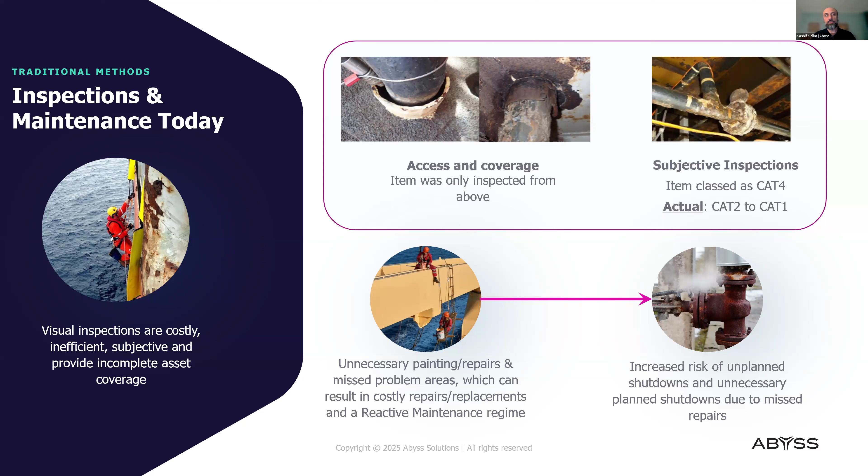Now, all that leads to unnecessary painting or repair work that ultimately leads to reactive maintenance. We don't want that as an industry. It increases the risk of unplanned shutdowns, loss of primary containment, and all these issues. That's why we keep hearing about unexpected plant shutdowns, remediation, reactive maintenance regimes and all that. Now, in the era that we are living in today, we have got a lot of industry advancements.

We talk about AI and machine learning, and there are tons and tons of techniques that are being utilized for, let's say, using the computer vision, amalgamating it with the AI and machine learning to come up with the value for the client. And again, that's one of the solutions that we have developed for the industry.

You have got advancements in field robotics. We talk about autonomous perceptions. A typical example is the autonomous vehicles. But imagine you've got a field robot that is intelligent enough to take the decisions independently. We are no longer going to give that robot a specific track to go through and carry out, let's say, operator rounds. No, these things are changing very rapidly. So the robot is actually able to sense and understand its surrounding, the perception, and take the decision independently. And that is because of the advanced sensor system that we have, supported by the cloud computing.

Now, all of these sensors, robots, they are generating terabytes of data. Now, in traditional or old days, we didn't have the infrastructure to actually, processing is a second stage, but even to store that kind of data was a challenge. But with the progress in cloud computing and cloud servers, the scalability has been amazing.

And last but not least, the subject matter expertise. I think that's very, very important. Given the sources of information and the databases that we have with years and years of experience, all of that combined together, that's what Abyss Solutions have leveraged and developed what we call the Abyss Fabric portal, which is an intelligent portal that takes in all the data and then processes it, and then we visualize that with all the insights.

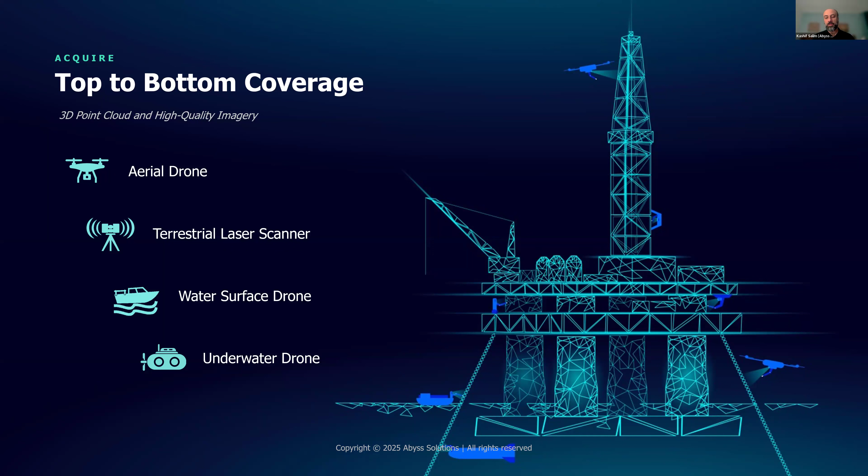Now, some examples of these robots. So I spoke about the autonomous surface vehicle, that is the Abyss Platypus, as we call it. It's a water-based platform. It's fitted with camera system, sonar, 360 laser technology, lidars, which give you 180 degrees within the underwater area. And then for the surface, you will also be able to cover any anomalies. This was originally designed for long canals, aqueducts. We've carried out some port inspections.

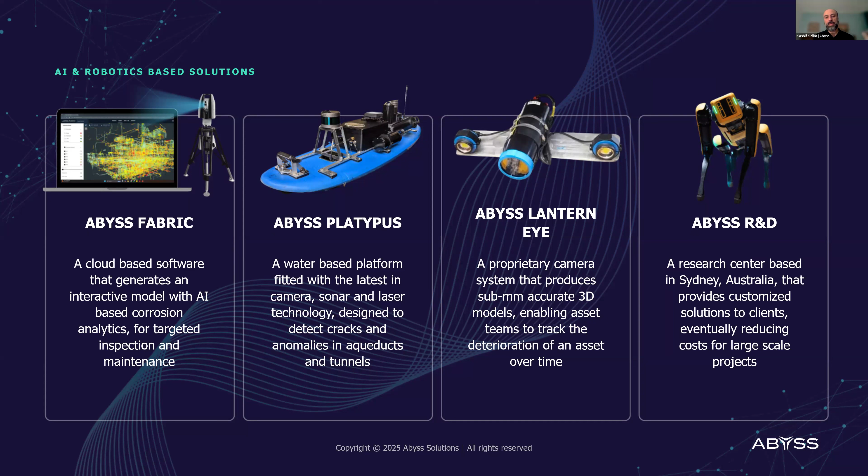That's again just one acquisition device that is used to capture the data. And then all of that is compiled together to then be processed in the Abyss Fabric platform. So that's the overall concept. Gather the data from various sources and compile that into one single source of truth.

So again, just an example of the terrestrial laser scanner. Now, this particular hardware is used for the offshore and onshore assets for the pressure equipment, including your piping and vessels and stuff. So with the laser scanner, first we carry out the scan plan by looking at the asset itself, looking at the CAD files, the general arrangement drawings.

We'll go in, carry out the data capture, make sure that we manage to capture maximum area and coverage, because that's very important. Because the next step that's going to happen is we'll apply the corrosion analytics using the AI algorithm and the computer vision on the surface that you see here.

So what the laser scanner does, it creates these hundreds and thousands or millions of points, what we call the point cloud on the surface. And that'll help create the digital twin, which is something that we can see the same asset in a virtual world.

Now, the TLS is doing two things. It's getting the point cloud, which is what you see on the screen, the green points, but it's also taking 360 images, or the RGB images, as we call them. And then we are able to combine the two together to create like a true view of the facility. You could do virtual tours, you could walk around and see the asset from the inspector's perspective.

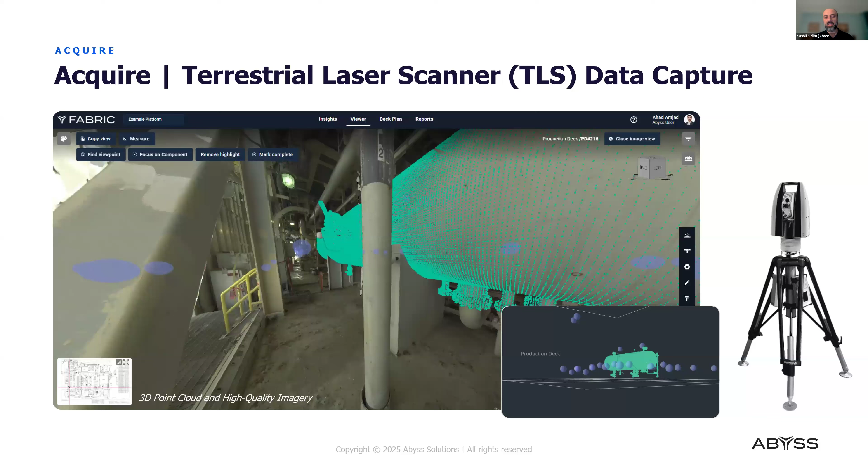Now, the TLS is utilized for the inside of the asset, but you could have the need for the drone in applications where you wanted to get data capture for the externals. Some examples could be the flare stacks, for example, or other offshore assets where the TLS could be a challenge in terms of accessibility. You could also use the drone images for structural elements like the railings from the outside. So it has its own benefits and value can be added.

So imagine data from TLS, data from drone combined together in Abyss Fabric, giving all the insights. That becomes very, very powerful for the client and for the insights.

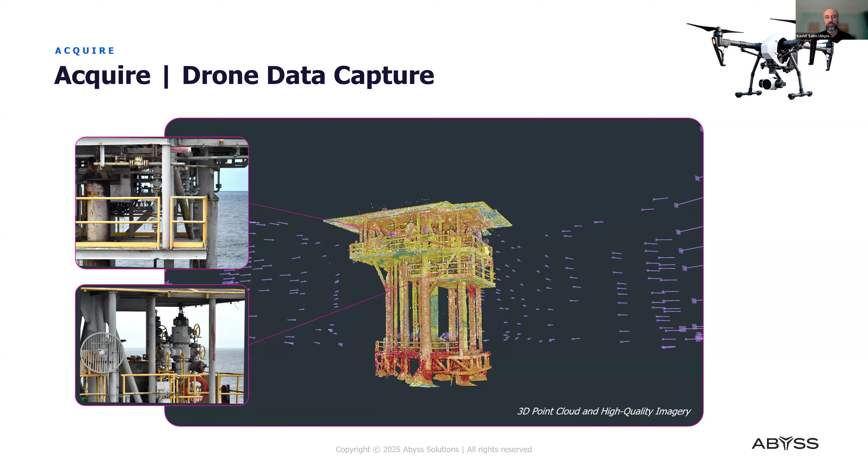The analysis part. So once we've got the data, we are able to then apply the AI and the ML algorithms to identify and classify the corrosion stage. So light, moderate, and heavy, for example. There are definitions. These can be customized.

We are also able to use some of the international standards like the ISO 4628-3, which is basically a method to assess the degree of rusting based on the density of the area. So all of these are built into the system.

So imagine you've got the data, you've applied the AI algorithm to analyze that to international standards or to the specific client's internal standards. So there's some customization that can be done to the system, and then working with the client's workflows, make it ideal for them to just integrate the digital system into their existing processes.

Now, obviously, with this type of outcome, there's always questions around the accuracies. So we have done some round robins, we have done some actual validations in the lab, site validations, and in terms of high-level results, we've got 97% accuracies on heavy corrosion, and that's important because heavy can lead to imminent problems. Heavy could have blister heights, for example, the corrosion scab. The larger the scab, the higher chances of wall loss.

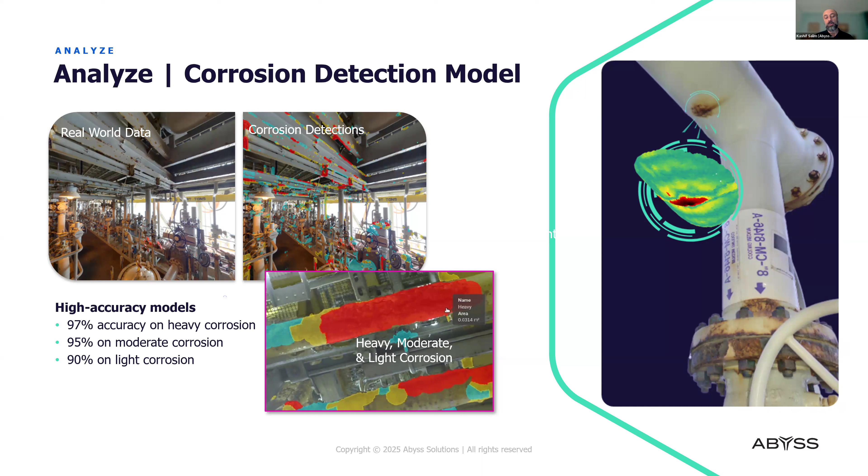Light corrosion is something which is what we call or define as coating breakdown. So it's kind of the coating has damaged and it has sort of started having some rust marks, something which can be readily remediated through, let's say, quick paint jobs. Now again, that is a value. If we can identify all the quick remedy areas, that is again a value for the client. So all of that is possible because of the digital nature of inspections.

Now, in terms of the insights, right? So, of course, when you talk about insights, you've got management dashboards to work packs generation, to where is my anomaly or where are my hotspots, where is my prioritization list, and inspectors or the maintenance teams can go and attack the area that needs urgent attention. But imagine going down to measurements of surface area that is damaged versus clean, and within damage, what surface area requires quick painting and what requires spool replacement, for example.

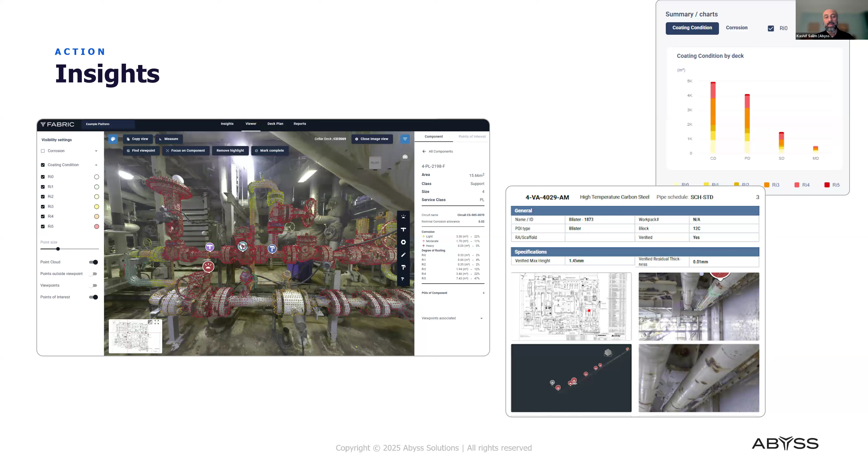Now that kind of data is gold when it comes to planning your maintenance or even procurement of your paint material for that matter, because now you can actually pinpoint exact amount of paint that you require, exact amount of resources that you require to go out at site and paint. The insights will give you opportunity to plan before you go into site. There's obviously a couple of other features, measurement tools and stuff like that. So that's the kind of insight that we'll be able to generate from that.

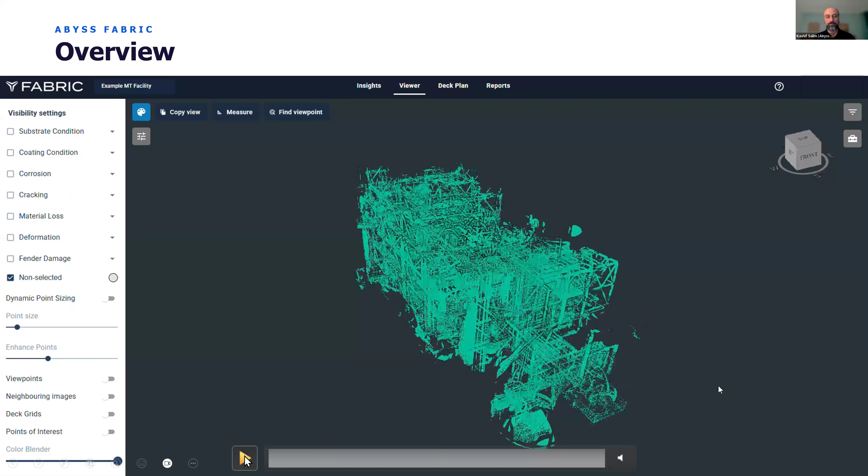Now, overall, if we look at a glimpse of the actual tool, so this is one of the assets, for example, I'm sorry, that has been captured. And my apologies. I just have to play with this.

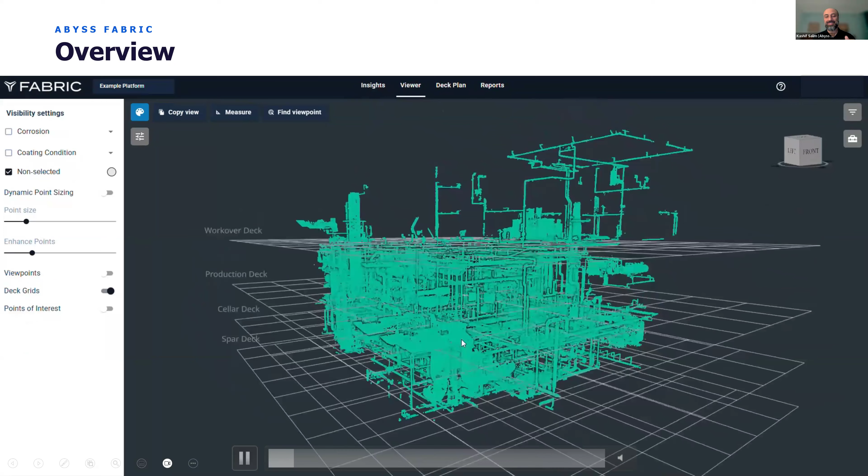So here you see a point cloud version of the asset that was scanned either through a TLS, a laser scanner, or a drone camera, right? And then the analysis part will allow us to actually segregate that. So we can actually cut it into various decks. We could do our analysis on deck level, on block level. So you could do some spatial arrangements there.

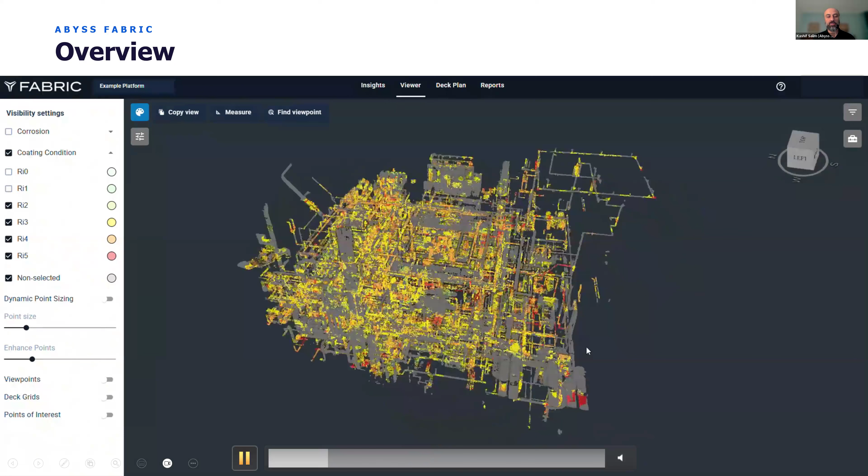And then you could apply basic filters, again, leveraging the AI, where in this case, we are applying the ISO standard for the RI values, which is your degree of rusting. And by just clicking a couple of links, let's say we're trying to look at RI 3, 4, and 5. So I can see as a bird's eye view, where are my hotspots? Where is my RI 4, RI 5 value? Right? At a click of a button at scale.

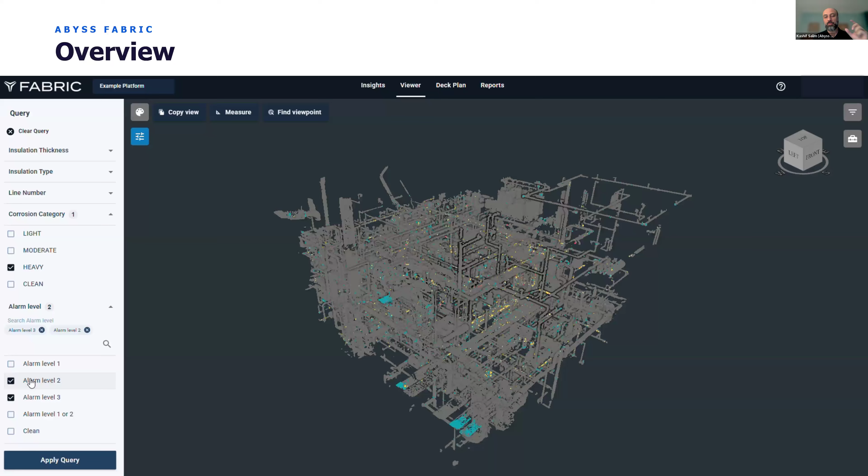Now I could do the same for, let's say, the corrosion analysis as well. Right now, I'm looking at the heavy, moderate, and light. Light being the coating damage, moderate being some sort of blistering or scaling, and heavy would be my corrosion scabs being developed, i.e. the height of the corrosion. So if I look at all my heavy lines in this case, right, I think we had about 2,000 lines on this particular asset.

Now, just by filtering all my heavies and alarm level 2 and 3, if you look at the left pane there, I'm able to come down to about 50 lines that are of interest to me as, let's say, an integrity manager or a maintenance manager. So I know that I need to plan my remediation, my maintenance on these specific lines. And remember, these lines are contextualized or they are tagged according to the client's P&IDs and their isometrics. So in a way, that process is also being digitized.

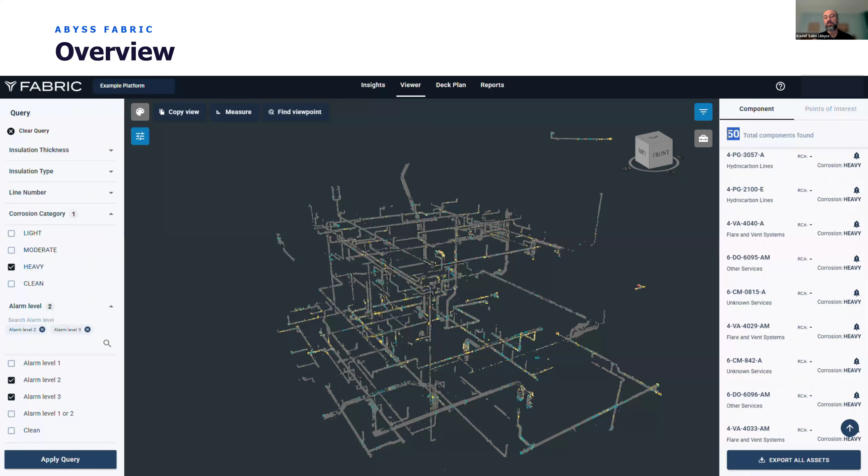So I can actually pull up individual tag number. I can pull up all my heavies on, say, 10-inch line, or I could pull up my alarm level 3s, which means if I don't do any remediation in the next sort of 8 to 12 months, this could likely go into failure or some form of a loss of containment. This kind of gives us that risk profiling on individual line on each component level, which again I think is very, very powerful.

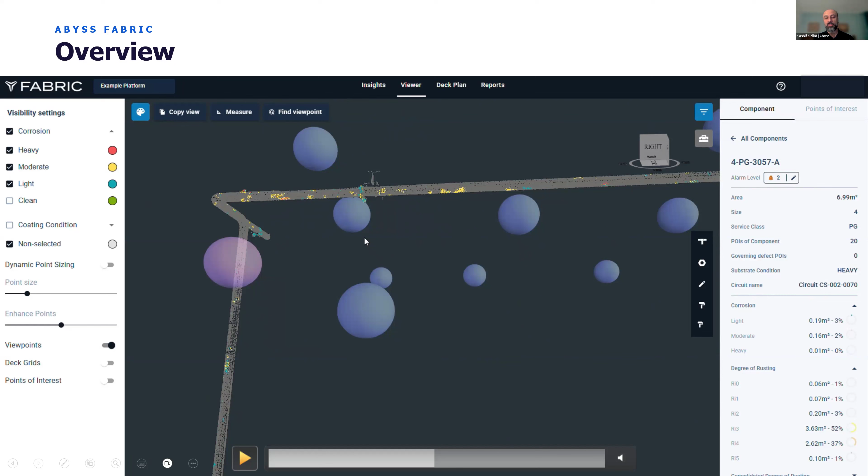So again, we can pull in each line in the 3D isometrics world. The purple balls, by the way, are the scan locations where the scans would have been taken, making sure that we cover the whole asset on component level. And the corrosion mask is available on the 3D isometrics. Again, we can see that holistically and then go into a specific point.

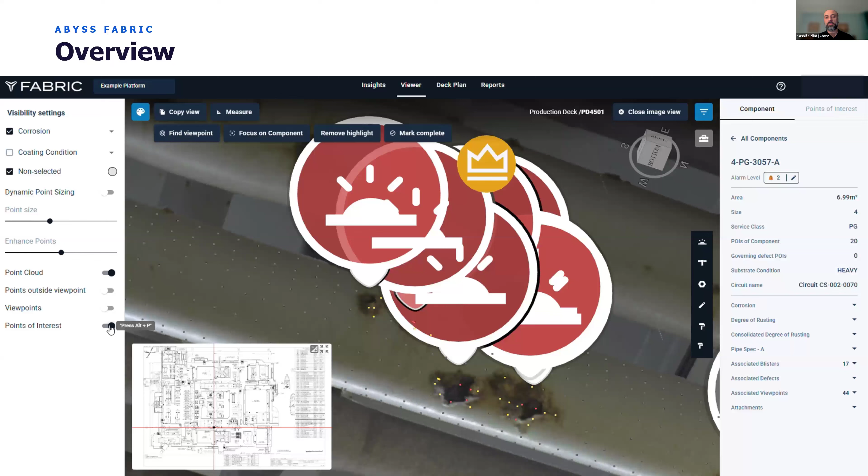So again, clicking on one of the scan locations, I can see in my true viewer what that blister looks like. And you can see based on the corrosion analytics, I can see the reds, the yellows, and the greens. The system will also allow us to put certain points of interest, or POI as we call them. So I can see all my blisters. I can search them. It's a database that I can always get into.

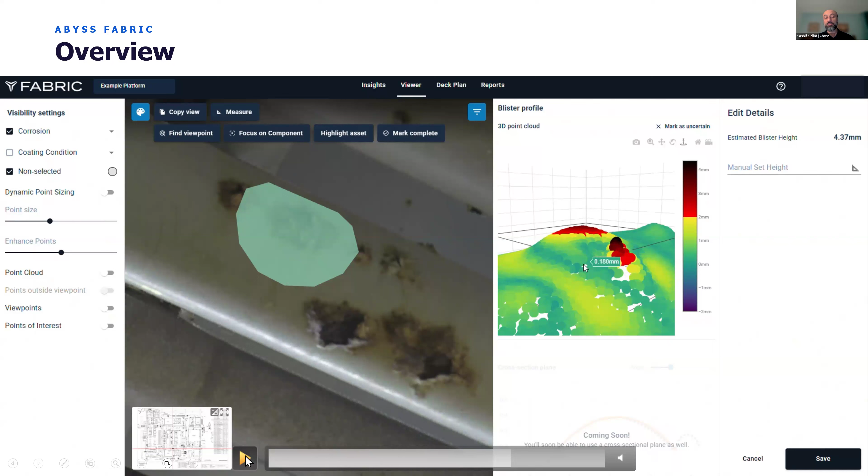Now, we saw earlier the blister height analysis tool. That is the measurement of the surface: what is the footprint of the profile and what is the height of the profile. And that again is giving us the insights at scale. So we are able to generate that insight at scale for all the blisters. This is fully automated with the provision for manual intervention if required.

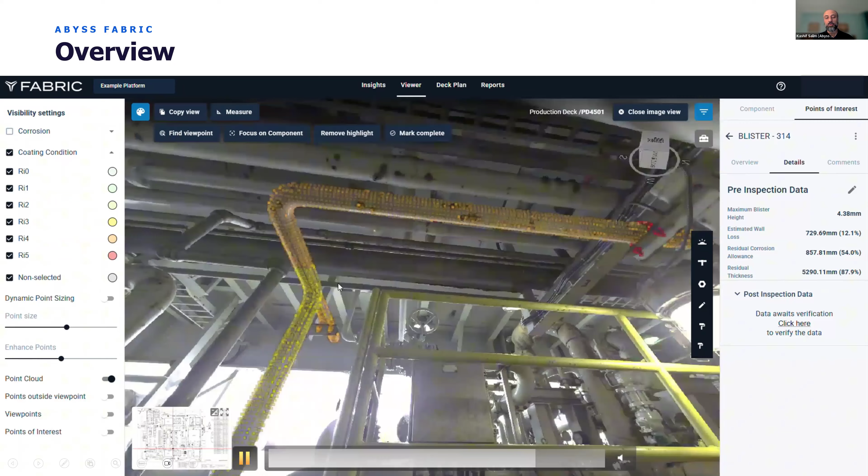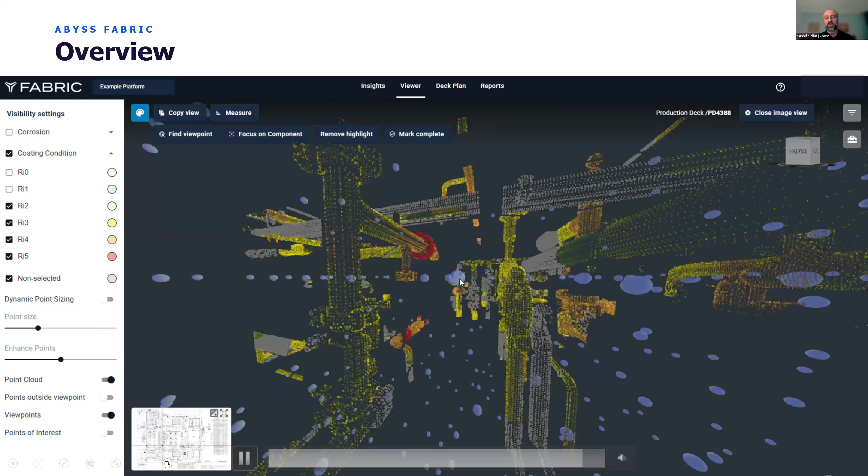So if, let's say, an inspector goes to site and he wants to validate something, or he has found something different, then there's always that opportunity to adjust the numbers. But the system is able to carry that out on an autonomous basis. Similarly, we could do the same for the degree of rusting, which is useful for the maintenance team and for painting purposes. All right. So that's an overall overview of the system.

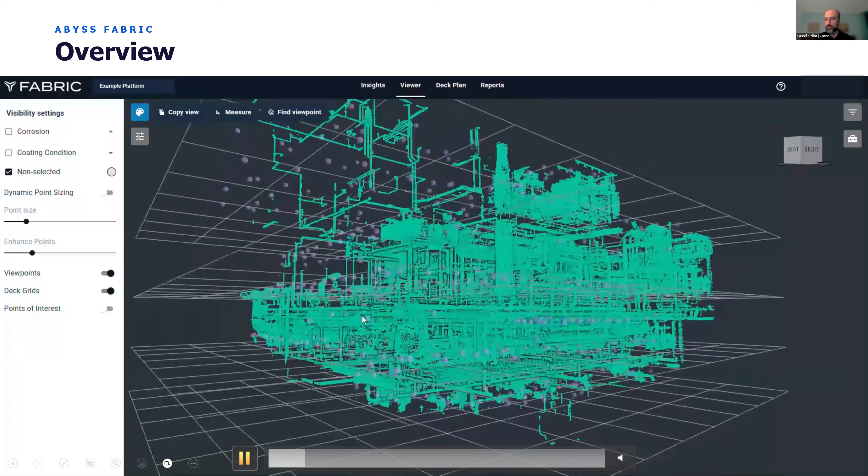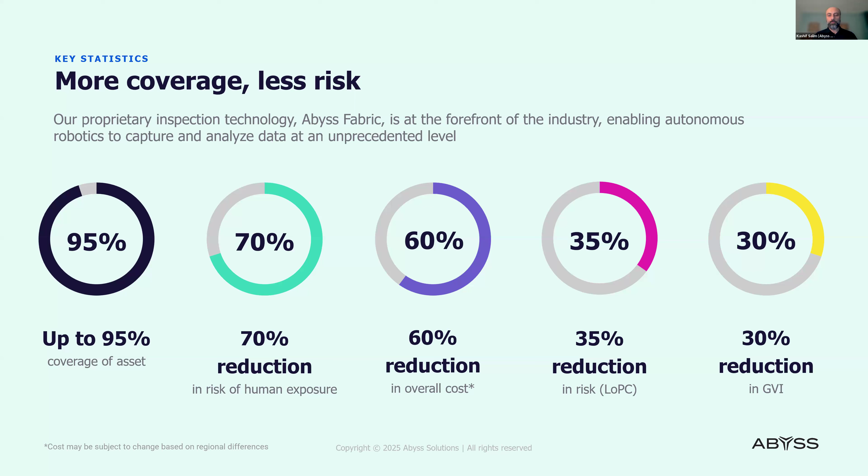Praful, how are we doing on time? Sorry, you probably are on mute. Let me just see. Okay, it's okay. I think we are doing very well on time. If you want to show a few more slides, you're welcome. Otherwise, there are some questions which are already coming. Definitely, sure. Thank you for that. I think we have 10 more minutes for your presentation, and then we can jump into questions and answers.

Excellent. So I think that nicely brings us to a couple of case studies on the technology itself, because there are technologies available out there, but if you can't really get value out of it, it sometimes sits on the shelf and doesn't really add much to the operations, right? Now, in this case, we're looking at the coatings management side of things. With this client, they had severe corrosion issues. And Abyss Fabric's AI solution was applied there, and we looked at some of the insights.

In this particular case, the assessment was carried out as per the ISO 4628-3 standard for the whole platform, and we looked at the paint-related issues. What we found, compared with their existing maintenance plans, is that with the Abyss Fabric tool, based on the digital insights and the AI algorithms, we were able to reduce paint for the low consequence lines by 60%, which means less paint material.

Lines that did not require painting were previously painted, but the insights from the exercise allowed them not to paint those areas. Instead, that paint material was applied on high consequence lines, which were identified by the system. So straight away, that is risk reduction, extending the life of the asset by not painting where it's not needed, but putting more paint where it is actually needed. Similarly, we reduced undeteriorated lines that were painted by about 18%, and 17% more damaged lines were painted, leading to a much bigger risk reduction for this particular asset.

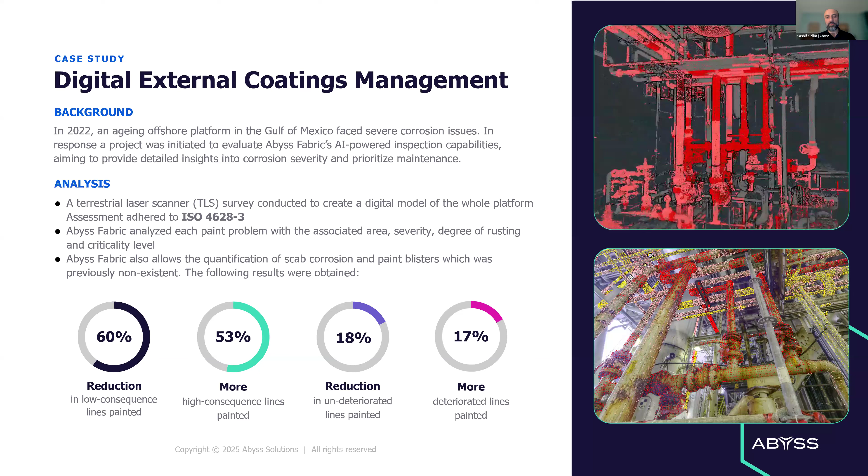The very next year, we introduced the Abyss Fabric tool for the first time. And the results were very clear. We moved from 20% platform coverage to 95% in much less time. We utilized only 20 personnel on board days.

And that's the time that we require to actually mobilize to site, carry out the data capture, and demobilize. So for a decent size platform or an onshore facility, you're talking about anywhere from a week to maybe 2 or even 3 weeks in certain cases that you need to be at site carrying out the data capture. Compare that with somebody who was there for the whole year doing 28-day rotations month on month, right? So that's another major advantage with the digital system.

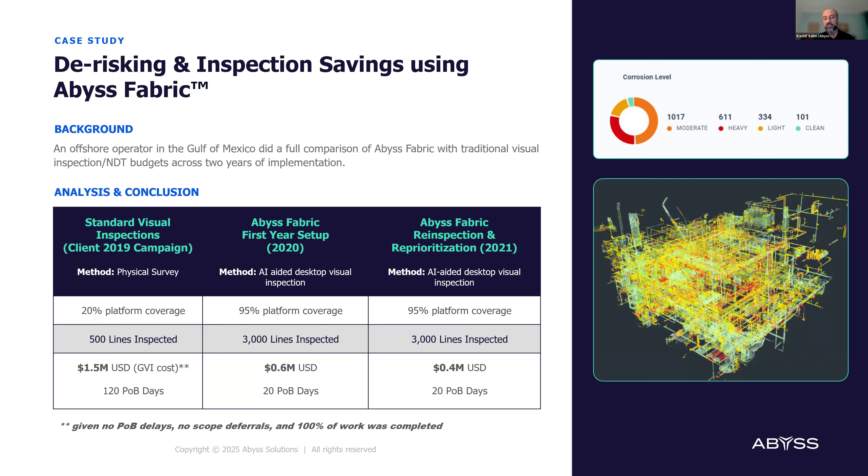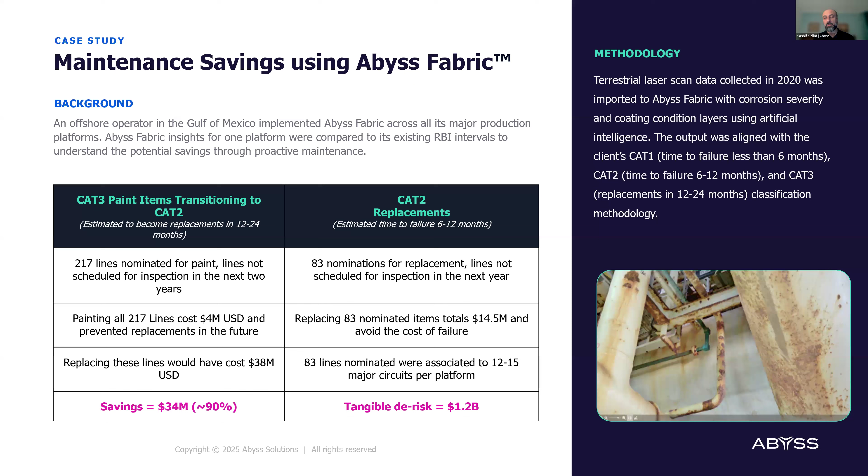Now, 83 components or lines were nominated for replacement. It cost them $14.5 million in this case. But what it did is it saved them from the risk, which could have gone into a significant number. In this case, numbers provided by this particular client went into a whopping $1.2 billion tangible de-risking amount. So definitely the value is out there. We just need to work with the clients on how we can generate that value.

We as corrosion engineers will have better understanding of our problems, but if we don't have knowledge of AI, or if we're not coordinating with the robotics or AI engineers, we cannot have a solution that will be good for all. We need to work together to bring solutions that can help reduce the corrosion cost significantly. We saw the opportunity size is massive, as Mr. Amin Nasser was speaking at the event there. But most importantly, I would close with the fact that we need to develop solutions that are sustainable and have positive impact for our planet. And technology can help us with that.

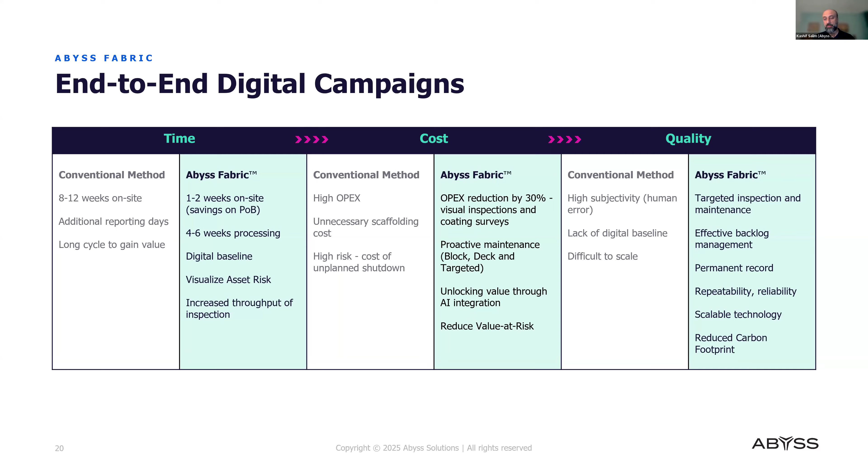That was a very insightful presentation on the real use case of AI in the real world with some good tangible outcomes. I mean, some people believe that AI is a buzzword in many sectors, but when we see the real use cases with the real impact, that's where it's not a buzzword. It's actually real impact. So thanks for that.